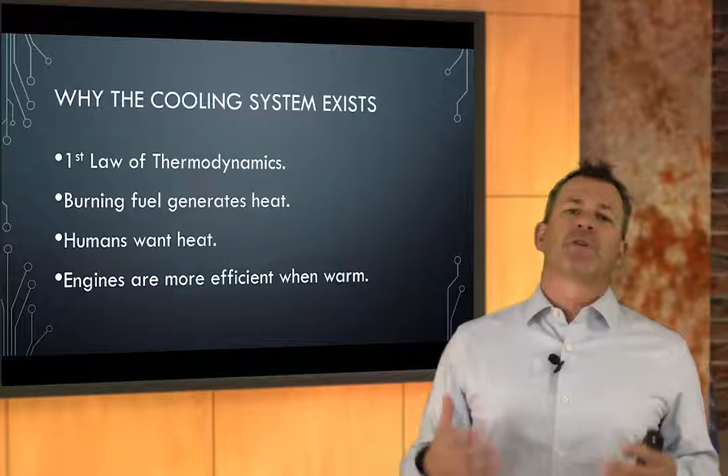But here's the good news. The good news is humans want heat, right? Because if we're driving our cars around in Canada, in January, we're going to need a lot of heat to stay warm. And from an emission standpoint, engines are way more efficient when they are warm. So the cooling system is there to do all these things. It's to get rid of excess heat. It's to give us humans heat when we want heat. And it's to get that engine up to temperature as quickly as possible for the sake of emissions. It's got to circulate the coolant in order to do all this, right?

Now, why do we not just use water? Well, we'll get to that. I think you'll be able to answer your own question pretty shortly here when we discuss the benefits of coolant and the attributes of coolant.

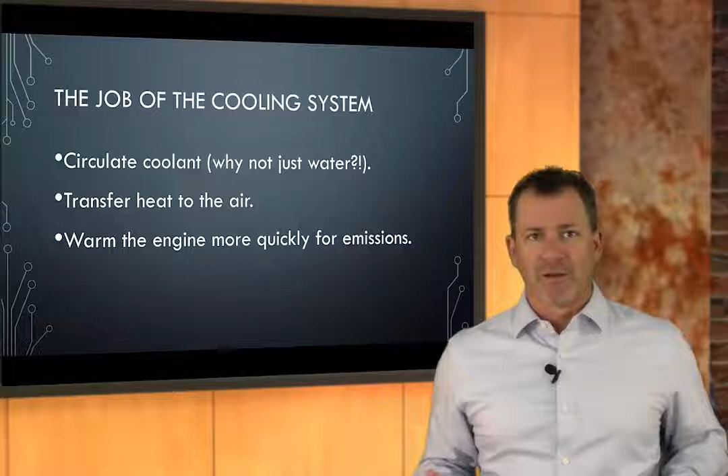The cooling system also has to be able to transfer all that extra heat to the air, whether we're going to try to get rid of it in the radiator or whether we're going to give it to the passengers in the passenger compartment to keep them warm. Either way, we've got to transfer heat to the air. And then, as I said a minute ago, the cooling system needs to warm that engine as quickly as possible for the sake of emissions. So this is the job that the cooling system has to accomplish.

Now, the components of the cooling system are many. And look, I'll be honest, when I sat down to write this, the cooling system as a system sounds pretty simple. But when you start thinking about all the components and what those components do, it gets really complex. So for the sake of time in this program, and because we have so many components to this system, I'm going to keep this at maybe the 60,000 foot level. So if you're a former technician watching this, yes, there are some pieces missing here, but the general idea is there, and it's enough to have a conversation with the customer, and it's enough to start the conversation with the technician.

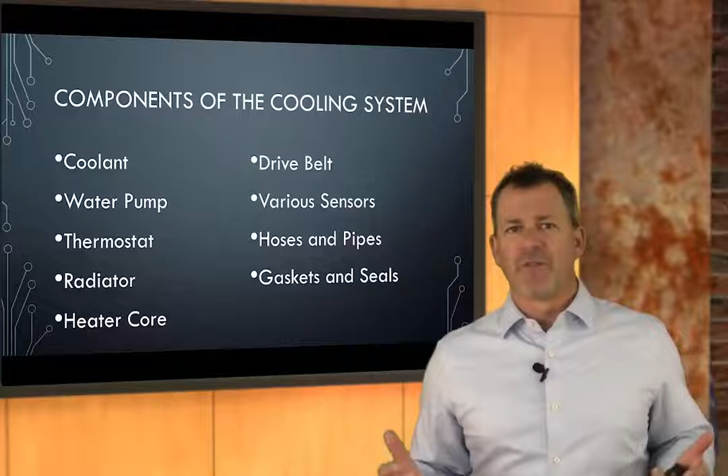So components of the cooling system: we've got the coolant, we've got a water pump, we've got the thermostat, a radiator, a heater core, drive belts, a bunch of different sensors on today's cars, hoses and pipes to move all this stuff, and then all the gaskets and seals that keep the coolant in the system.

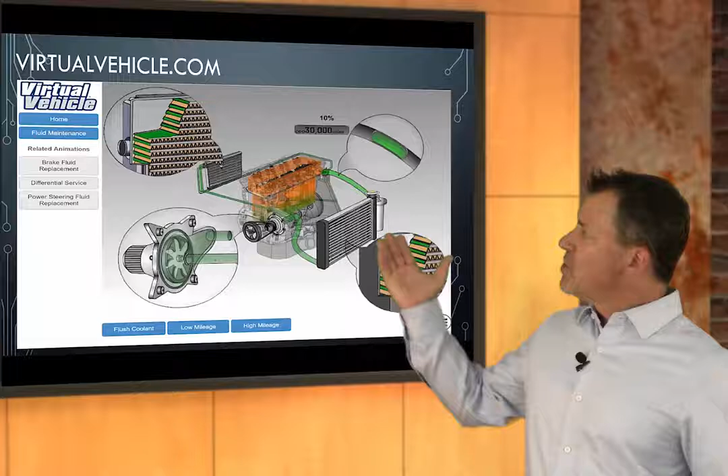So a great way of learning the cooling system and or showing it, demonstrating it to your customers is to use Virtual Vehicle. Go to virtualvehicle.com with your user and your password if you're a TechNet shop. If you're not, you can sign up for access to it for a low subscription fee. And it's really, really worth it because as you can see in this diagram alone, they're great animations, they're great renderings of the system, and you can even put it all into motion if you want to really demonstrate to the customer what exactly the cooling system does, is, and how it operates.

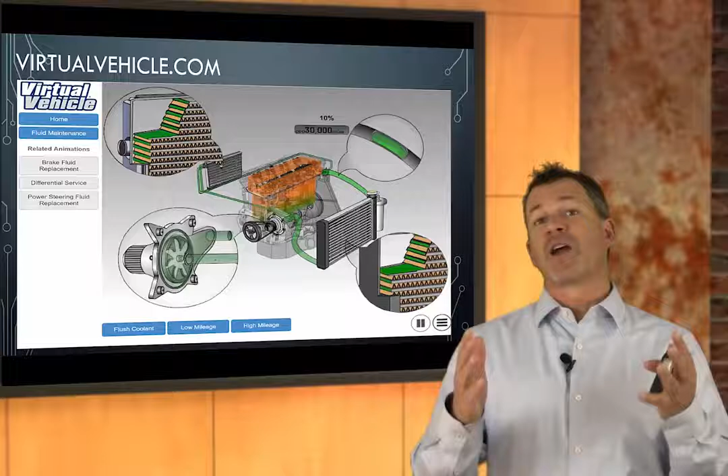And you can learn something from this yourself, all right? So use this tool to better learn some of the components, to visualize what these components do, and to educate your customers on what these things do. Let's talk about the coolant first. One of those components, right? It does a whole bunch of jobs. It sounds like it does one job, cool, but it doesn't.

You see, that chemistry in that coolant has a higher boiling point than water does. And when it has a higher boiling point than water, that means it can hold more heat. And if it can hold more heat, it can transfer more heat. So we can't just use water because we need it to hold a lot of heat. So we have to have this chemistry, this chemical compound that we're going to call coolant.

It also has to provide some lubrication properties for the water pump because it does have a pump in the middle of it that is spinning, and spinning things generate some heat. So we need to keep that as low as possible and keep things lubricated. So it's got a higher boiling point than water. It's got lubrication properties, and then because it's a fluid circulating amongst metal and it does contain some water, we have to use it to help prevent some corrosion. So it's got corrosion inhibitors in it.

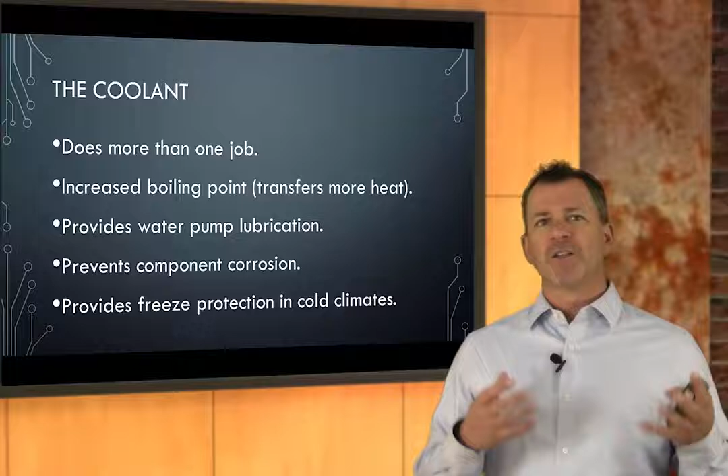And then in the really cold climates, we have to provide some freeze protection. So it boils at a high temperature, it freezes at an extremely low temperature, it has lubrication properties, and it prevents corrosion. Oh, and then it's got to be able to give up heat real easily too. So it's got all of these jobs. Well, think about what could possibly go wrong with the coolant. As with all vehicle fluids, these chemicals wear out. They're not there forever because they're doing a job.

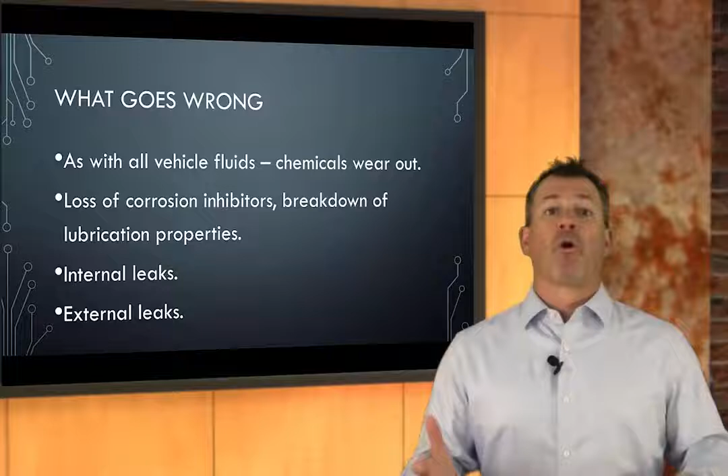The corrosion inhibitors alone, in order to prevent corrosion, they actually get used up. So the loss of those corrosion inhibitors and the subsequent breakdown of the lubrication properties, that's a problem, right? We lose those two things and half the job of the coolant's gone. And then, look, we could leak some out somewhere. We could have internal leaks. We could have external leaks. So it's a fluid with chemicals in it that wear out, and it can potentially leak from a bunch of places because, let's face it, we stick it in this mechanical thing and drive it down the road at 65 miles an hour under all kinds of different conditions. Things go wrong.

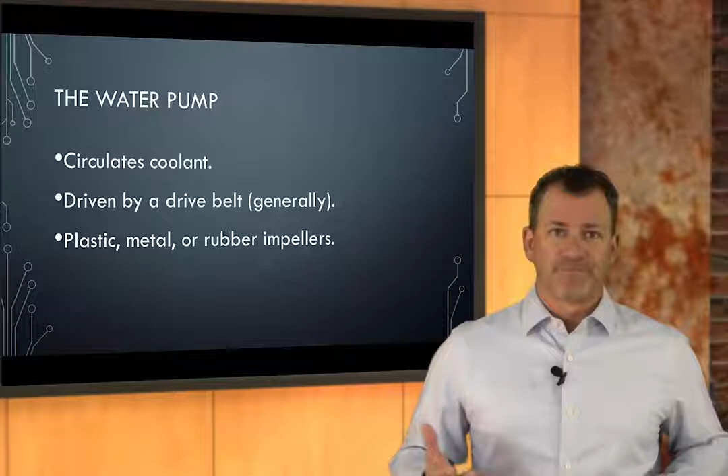The water pump. Water pump's job is to circulate coolant. It's driven by a drive belt. Generally, can you have gear-driven ones? Yep, you can, but you won't see many of those. And then the impeller, the fins, if you will, of the water pump that spin around, can be made out of plastic, metal, or rubber. So it's usually an aluminum housing, sometimes steel, spins at a high speed, and it has plastic, metal, or rubber impellers to make the coolant move. If this goes bad, what's a customer going to notice?

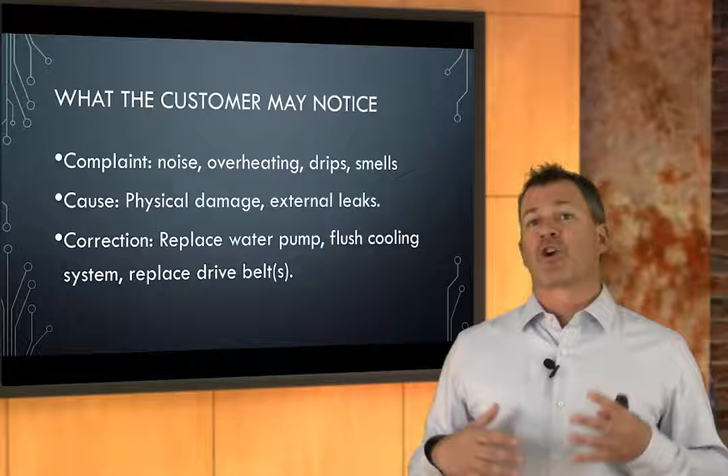Now, I'm going to point out again that I've laid this out in terms of the complaint, the cause, and the correction. We'll come back to coolant in a little bit, but for now, let's look at these hard fixed components in terms of the complaint, cause, correction, so that you get used to using these terms when you're engaging with a customer and or a technician for the sake of communicating what's wrong, what do we need to do to fix it, and how do we maybe keep this from happening in the future? So when the water pump goes bad, the customer could notice a noise, howling noise, grinding noise, rubbing noise, something like that.

They may describe it as all kinds of different things. They may notice the vehicle's overheating because now all of a sudden we can't circulate coolant maybe. If it's an external leak, maybe they'll notice a drip. If it's an internal leak, maybe they'll notice a funny smell, that burning coolant smell you may be familiar with.

What causes all this? There's too many causes to put in here. Could be physical damage, and physical damage comes from all kinds of things. It could be a bearing that just wore out. Now you've got that whistling noise or that little airplane noise in the engine.

There's a property of coolant that I didn't mention, and that property of coolant is anti-cavitation, a fancy term, I know. But cavitation is essentially the production of a whole bunch of bubbles due to the impeller of the water pump spinning around and mixing that coolant, allowing the coolant to boil off, if you will, to form these bubbles. And these bubbles act like little drills, and they'll actually destroy the water pump. There'll be physical damage. I'll show you some pictures in just a little bit.

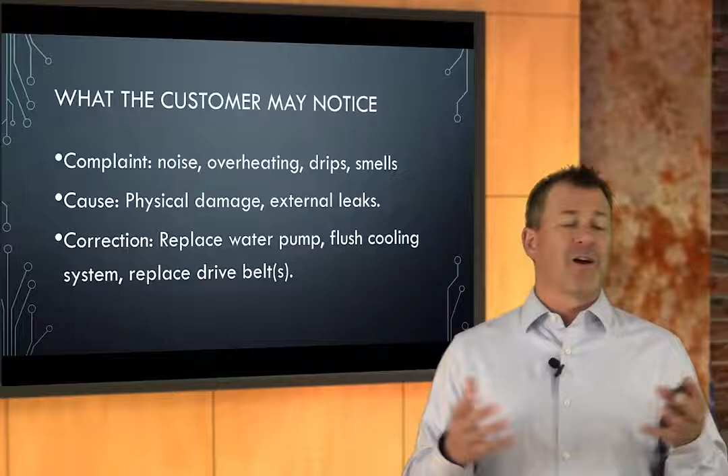What do we have to do to fix it? We're going to put a new water pump in, of course, and then we've got to flush the cooling system, and we've got to replace the drive belts. And you do all that together. You flush the cooling system, you get the debris out of there, you put a new water pump on there, so now we got new parts, new lubricant, new corrosion inhibitors, and then a drive belt, because chances are it's going to need a new drive belt anyway.

Then there's the thermostat, right? Thermostat, we think of it as keeping the engine warm. Well, really what it does is it keeps the engine at a consistent temperature. And with fuel-injected vehicles, that's very, very important because it all relates to fuel consumption and emissions. When that thermostat's closed, it doesn't allow coolant to circulate. Will a little bit circulate? Yes, it will. There's bypass tubes and whatnot, but we're not going to get that fancy here.

When the thermostat's closed, it keeps the coolant in one place, allows the engine to heat up more quickly. When the thermostat opens, it allows coolant to flow to the radiator to get rid of some of that excess heat. Now, there's all kinds of fancy thermostats today, and we can actually control the thermostat to control how much coolant flows. But again, we're not going to go there. Let's keep this really simple. The more it's closed, the more heat in the engine; the more it's open, the more coolant we get to the radiator, and the more cooling there is.

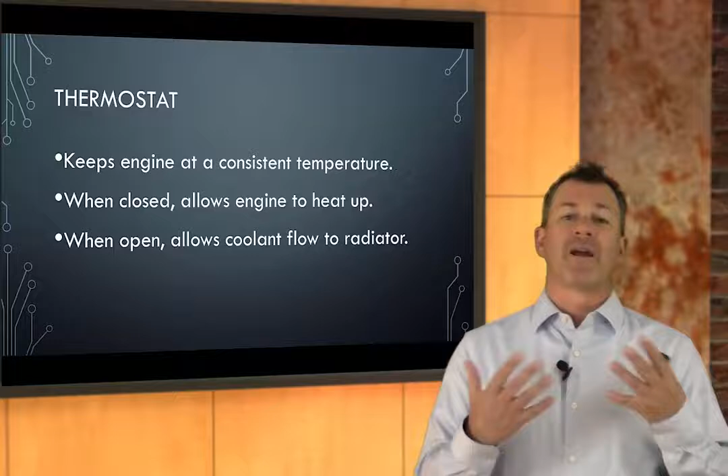Now, if things go bad, in today's cars, believe it or not, not only could you have poor heat inside the car because the engine just stays too cold, but you'll likely have a check engine light on. More on that in a little bit. Or it could be stuck closed and it's overheating. And all of these could be intermittent, or constant. And the cause of that is the thermostat's broken. Sticking open, sticking closed, sticking partly open, partly closed. Either way, it's not doing what it needs to do, most likely because of some physical condition.

What do we have to do? Put a new one in, and then flush the cooling system and replace any affected O-rings or gaskets that go along with the thermostat housing or the thermostat itself. So we're going to put a whole bunch of new parts in there, and we're going to put new coolant in there.

Now, remember, along with all of this, depending on what damage got caused because this component failed, you could have something as serious as a blown head gasket because the thermostat stuck shut, the engine overheated, the cylinder head and or the block expanded too much and tore the cylinder head gasket.

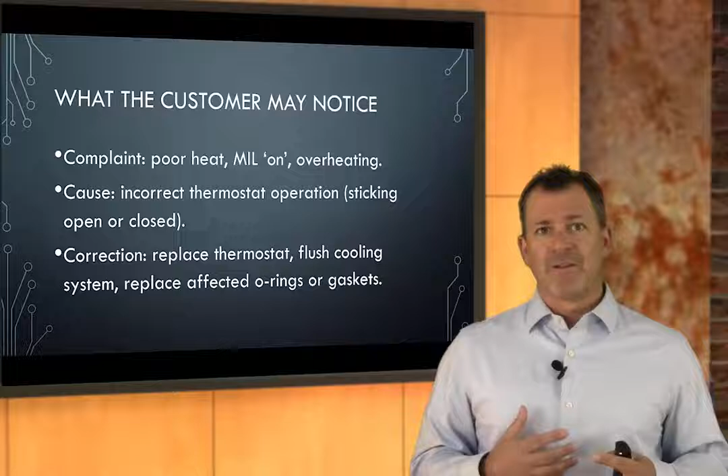So now it looks like we have a bad thermostat, and I did see this recently. It looks like we have a bad thermostat, but we go to fill the engine back up after the repair and it continues to overheat, or it continues to lose coolant, and then more diagnosis is needed. All right, so any one of these could create even bigger problems.

The radiator, well, its primary job is to transfer heat from the coolant to the atmosphere, to really the outside air. Now, that air is coming over the fins on the radiator, either from driving it down the road at low, moderate, or high speeds, or from the cooling fans turning on. So either way, we've got to get air over the external fins of the radiator so that the coolant can transfer its heat to those fins, and those fins transfer heat to the moving air.

Of course, as part of the radiator, and I chose to include it here with the radiator instead of making it a separate component, is the radiator cap. That radiator cap serves a very, very important purpose. It does two things. It keeps the pressure in the system, so it allows pressure to build in the system, which increases our boiling point. So the radiator cap actually helps to control the boiling point by controlling the pressure in the system.

And then as the system increases pressure and decreases pressure, that coolant will expand and contract just like everything else that heats up and cools down. And we want to be able to push coolant out of the system if we don't have enough space for it because it's expanded too much, and that's when it gets pushed into that expansion tank. And then we want to be able to draw some back in when it cools down and the coolant contracts. We want to be able to fill the space back up with some more coolant. So that's kind of the job of the radiator cap, to allow that to happen.

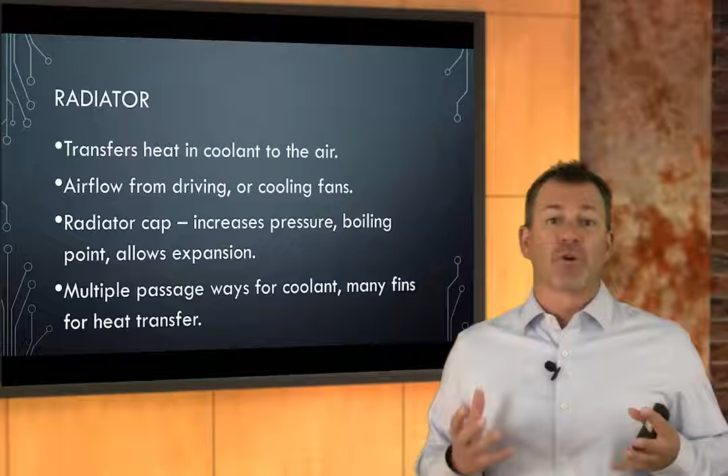So it's not just the radiator that's giving up heat from the coolant, but it's the radiator cap that helps control the pressure in the system, control the boiling point, and allows escape for extra fluid and for drawing in of fluid when it needs it. The radiator, of course, has multiple passageways for the coolant. It's like a labyrinth in there, and many, many, many fins for heat transfer.

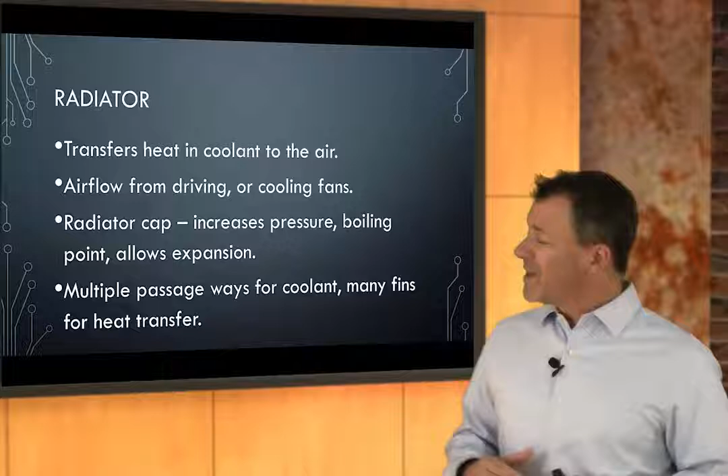Now, if things go wrong, we can have all kinds of different scenarios here with the radiator, because it's, I won't say it's a super complex component, but there's more to it than what you would think. The customer might notice the vehicle's overheating. Maybe they don't have any heat because cooling fans are running too much, maybe. We could have the check engine light on again. We could have external leaks and they'll notice some coolant on their garage floor maybe, or where they've parked their car last.

All kinds of things can cause what goes wrong with a radiator, but those corrosion inhibitors that wear out in the coolant, they can cause internal corrosion of the radiator, which will eventually spring a leak in that radiator. We could have deterioration of the fins. We have external corrosion that there's not a whole lot we could do about, because that's time and operating conditions. So we could have physical things that go wrong with this radiator. We could have cooling fans that don't operate, and there's a billion reasons for that we won't get into.

We could have an internal blockage because maybe the coolant was never changed and it's built up all kinds of sludge in there. The corrosion inhibitors have all become neutralized, and now we have a lot of corrosion and it's just nastiness circulating the system, and so we have an internally blocked radiator. Or any number of other physical things that could go wrong. A rock through it, a hawk through it. All right, so the radiator can be damaged internally or externally.

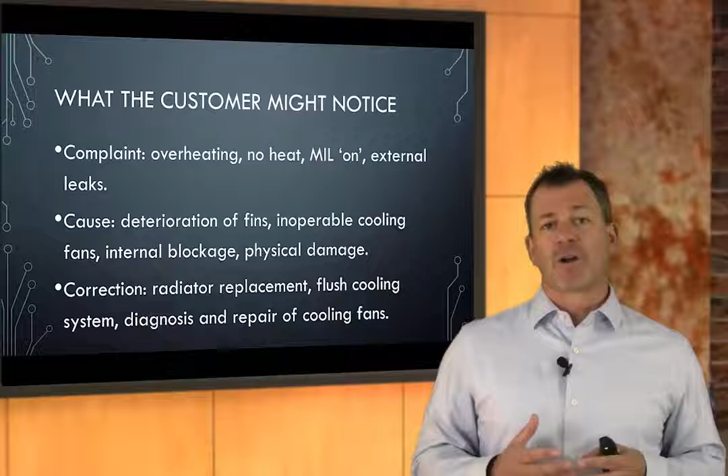What do we have to do to fix it? You got it. Replace the radiator, flush the cooling system, replace the coolant in there, and look, if it's a cooling fan issue, we've got to diagnose and repair the cooling fan circuits. The heater core.

So many parts, huh? The heater core, it's like a mini radiator, only it's inside the automobile. And its job is to give off heat in the passenger compartment. So if we don't want heat, we've got to keep coolant out of it. So we just say to the valve that controls the coolant flow through it, we shut that off and no coolant through the heater core. If we want heat in that compartment, then we open the valve and allow the hot coolant to flow through that heater core so it can give off heat to us, the passengers.

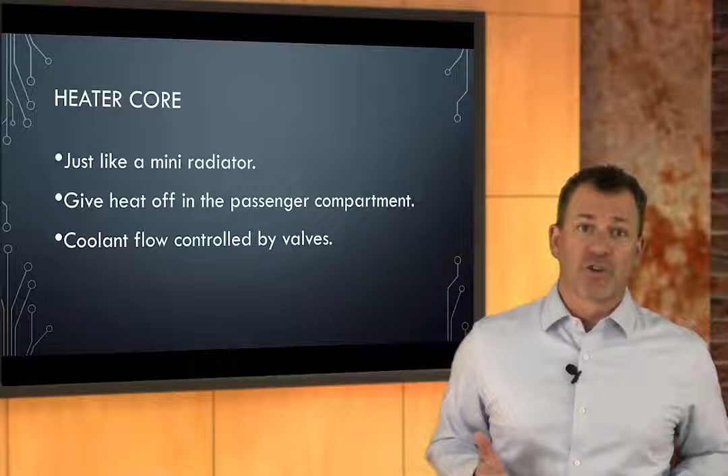What would a customer notice if the heater core goes bad? Well, they might notice no heat, or maybe not enough heat. Maybe it's not no heat, but maybe it just gets warm in here, but I want it hot. Maybe they notice gurgling noises in the system. And that's not so much of a heater core problem as that is a low coolant problem, or maybe a head gasket problem, or something indicative of something more serious.

The cause of all this could be internal blockage, it could be poor valve operation, it could be an external blockage of the fins itself. Maybe a mouse climbed into that heater box, I should say, heater core box, and built itself a nice warm house. But it's going to take all the heat from us and not give us any in the passenger compartment. Right, so there's just a very few causes of heater cores going bad, but what I've left out here too is physical damage. Do they rot out and leak? Yeah, they do. They can corrode enough and start causing a leak.

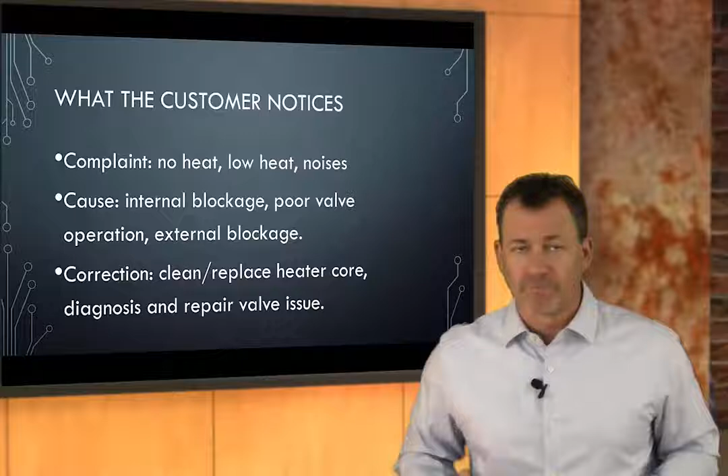What do we do if there's a heater core problem? We've got to clean and/or replace that heater core, which is not a fun job usually. Usually that's a dashboard job that no technician likes to get into. Or we've got to diagnose and repair any valve issues that might be responsible for no coolant flowing through this heater core. Now, we're going to start running out of components here, right? Thankfully. Probably too much for you, but that's okay.

Drive belts. The drive belt. Now, many water pumps are driven by the timing belt. So it may have a separate accessory belt, or it may be driven by the timing belt. Now, of course, if it's driven by the timing belt, this opens up a whole other discussion, right? Because if we have a leaky water pump or we've got a bad timing belt, they kind of go together, because all that labor to get in there has been expended.

Once you get in there to do a timing belt, you might as well put an idler pulley in there, you might as well put a tensioner in there, you might as well put a new water pump on there, because what is it? Another half-hour of labor, another hour of labor, instead of having to rip all that open again if and when the water pump goes bad. If the water pump went bad, well, you might as well put a new part in there if you're taking the timing belt off anyway. So there could be a couple of different ways the water pump is driven, but either way, it's generally a belt. And these are maintenance items.

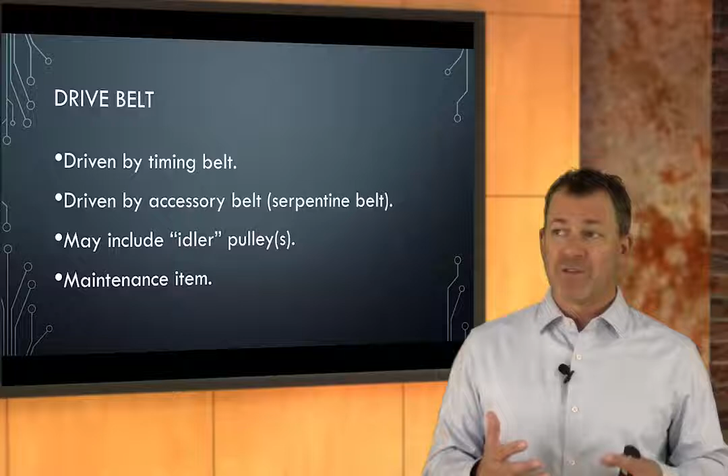So you can have this conversation with the customer about not only does the timing belt control engine timing, but it also drives your water pump. So it actually has a really, really important job, and we ought to take care of that. What the customer might notice if a drive belt goes bad, of course, noises, and if it goes really bad and actually breaks, if it's a timing belt, the engine won't be running, right? If it's an accessory drive belt that's driving the water pump, then the vehicle could just be overheating.

And look, they're belts. They operate in a hot environment, a not so nice environment. And so you can have deterioration over time of the belt. You can also have pulley bearing damage, so there are idler pulleys and whatnot in there, or you could have a water pump pulley going bad, a bearing in the water pump going bad, and putting stress on the belt.

The belt starts to slip, and eventually it wears. To fix it, we've got to put a new drive belt on there and replace whatever affected parts. Now again, if it's driven by the timing belt, that's a whole other conversation.

While we're in there to replace the timing belt, we might as well replace the water pump as well for the little bit of extra labor and the extra expense of the pump, because hey, we know these things leak, we know these things go bad, and again, the time's already been taken to go that far. We don't want to have to take all that apart again and charge the customer again for doing that a year from now, 2 years from now. Okay, make sense? I hope so.

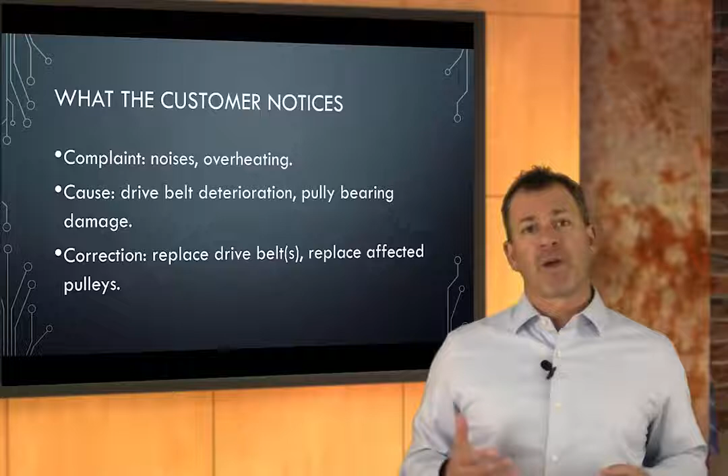Now, we've also got hoses, pipes, gaskets, seals. All these things either allow the fluid to circulate throughout the system, or keep the fluid in the system, right? And oftentimes, all these hoses and pipes are related or at least involved in the removal and replacement of engine components. So you could do a job like an intake gasket, and the intake gasket actually seals part of the system. So the cooling system touches a lot of components in the automobile.

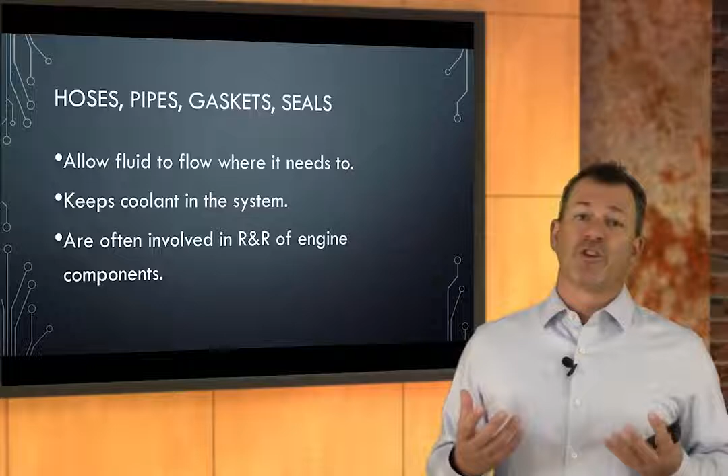It can even touch the transmission cooling system. So it's not a simple system. It does a very, very important job, and things go wrong with it. When these things go bad, of course, the customer's going to notice external leaks or overheating, no heating, poor heating, things like that. We've got to isolate the damage to those hoses, pipes, gaskets. We've got to figure out why we've lost engine coolant, and then we've got to fix that.

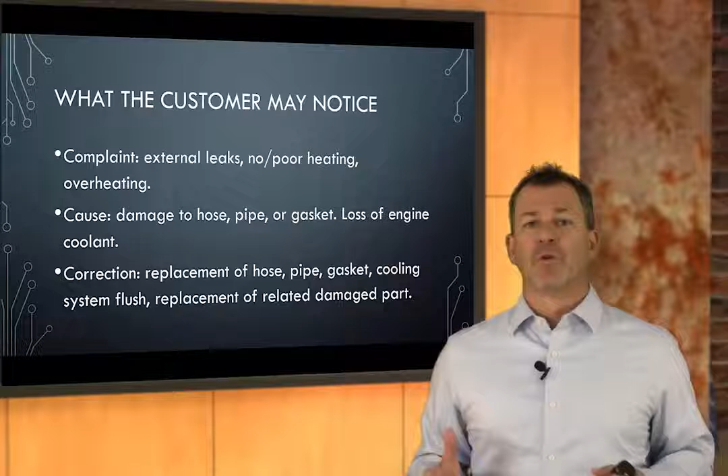So we've got to reseal the system. As part of that, you're gonna clean the system out. You're gonna fill it with new coolant, and you're gonna seal up whatever went bad.

Now, there's also all these sensors. In new automobiles, engineers recognize the relation of engine temperature to emissions, to fuel control, and so we've got all kinds of sensors to alert the system if something goes wrong. We monitor the cooling system for coolant flow. We monitor it just to give the driver some information, right? Temperature, warning lights. We monitor it for proper engine temperature. And if any of these things goes wrong, the diagnostic logic in the computer can recognize it, and it will turn the check engine light on.

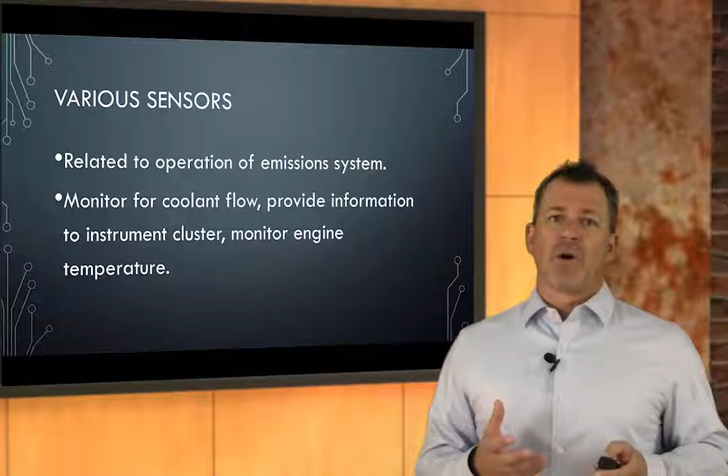So a lot of the time, all the preventative maintenance we do is to keep the check engine light from coming on. If these sensors go bad, or really anything in the system goes bad, the check engine light's going to come on. And there are too many causes to get into here, but it could be the sensor itself, could be the coolant, lack of coolant, could be a component failing, could be a water pump's gone bad, wiring, computer, all kinds of things. We need diagnosis first and then repair.

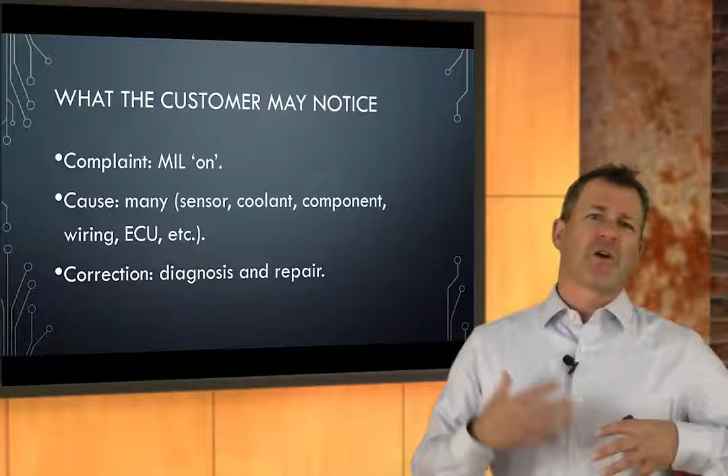So the cooling system, you see what I mean? When I started getting into this, I'm like, whoa, this may be too much for a 20-minute program, but I just want to give you a 60,000 foot level: what the components are, what they do, what the customer may notice, and what we've got to do to take care of these customer concerns.

In summary, before we get to selling cooling system service in the next program, there's a ton of components, right? We saw that. But the coolant is absolutely the most critical component to the proper operation of all of these components. It takes care of all of these many components, from the sensors to the water pump to the thermostat to the radiator. The coolant is the key to the entire system.

And that cooling system has a big responsibility. It's responsible to maintain a consistent engine temperature, to give us some heat when us humans want it, and to keep emissions in. Remember, emissions are related directly to fuel economy, to keep emissions and fuel economy right where they ought to be, where the engineers designed them to be.

Go through the program again, folks, okay? Visit it one section at a time. Go check out Virtual Vehicle for better virtual descriptions of the system.